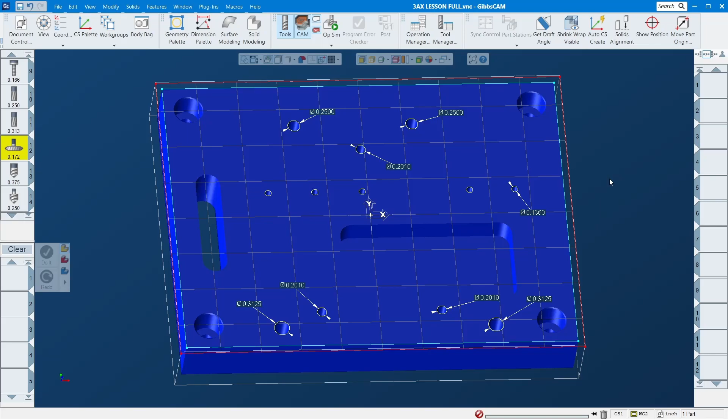Hi everybody, JT here. This video will include all the toolpaths if you want to make a program for a 3-axis machine. I used to make those toolpaths piece by piece, but this one I want to make so if you're new, if you want to start from the beginning, this video will include everything from face mill, volume mill, ream, a hole tap, a hole thread mill, a whole pocket and contour. So everything will be included in this video. If you watch this as a newcomer to GibbsCam, you will be able to learn it and apply this to your job, and then you can make your program independently. It will be long, so let's get started and hang out with me here.

So I modeled this one, right? Let me turn on the print. So this one basically had two dowel holes, side counterbore, tap 8-32, and one quarter-20 tap also, and some pocket and slot here, right?

So I cut time by creating all the tools here. Basically face mill and mill to finish outside and the pocket and slot, and this end mill is finished for the counterbore here, drill for 8-32, drill for quarter-20. This drill is for quarter reamer hole, and this one for this 5-16, and this drill is for the counterbore, and this is the 8-32 tap tool.

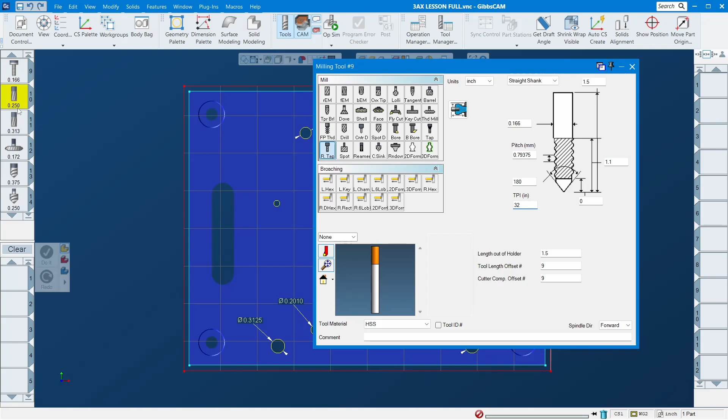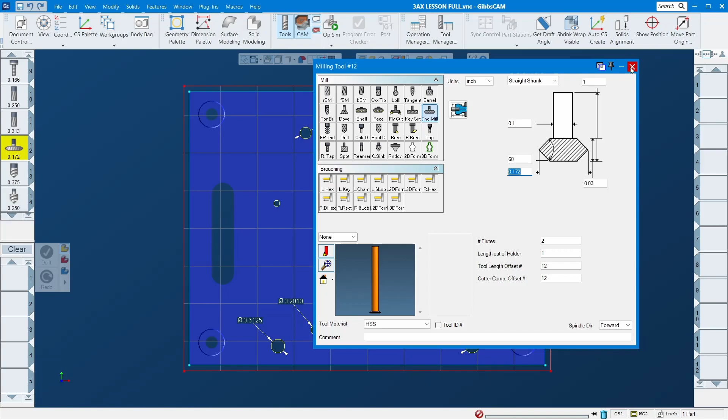Alright, so if you don't know how to set up the tap tool, it's in here. Put in diameter, measure diameter of the tap, and put this TPI in inches. If you do metric, you put it here, 0.5, 1, something like that. This one is the reamer for this, and this one is the reamer for that. This is the thread mill. You just get your caliper out, measure, and put all this number in roughly. This is spot drill. This is the chamfer tool. So all of these, as you can see, it's only this simple part, but it takes 14 tools already.

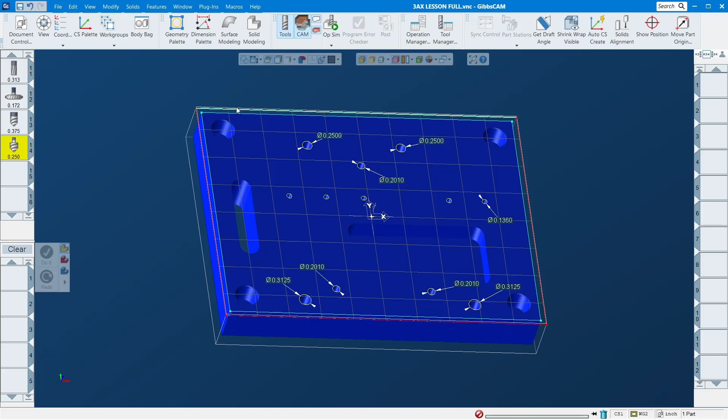All right, so that's the tool setup, right? The next one is the geometry. Let's draw the stock first, right? As you can see here, this one will be how long it is. Let's measure the 8 inches long. Okay, so that's 8 and 6, right? So the stock I draw is 8 1/4 and 6 1/4 because you want like an 8th per side bigger. So when you draw it out, you have a good outside finish.

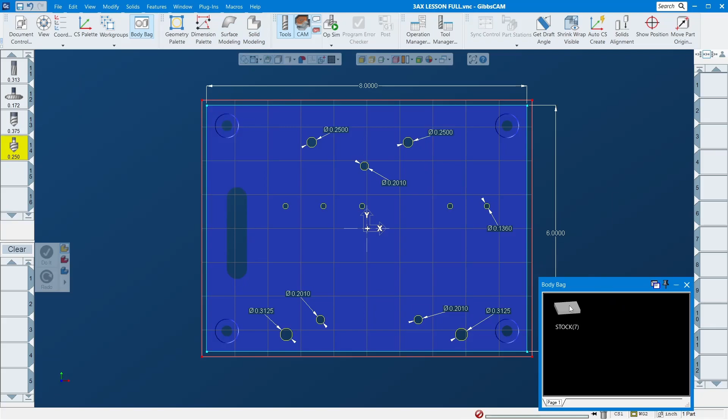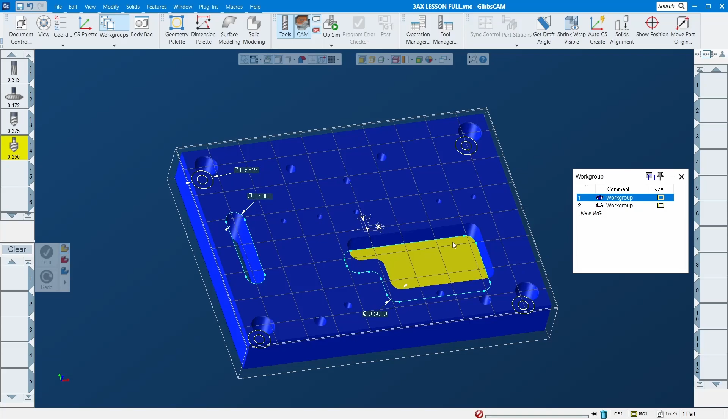But I also draw it, and here I also make the solid model for it, just so when you render it you can see it. It's a good habit to make your stock if you're new, so you know what your stock size is. So that is a stock, right? The next one is geometry. As you can see, I extract our geometry and dimension of these out so you can see it easily. And in here, this is the pocket, that's a counterbore, and that's the radius of the corner radius of that pocket. Okay, so that is the geometry, right?

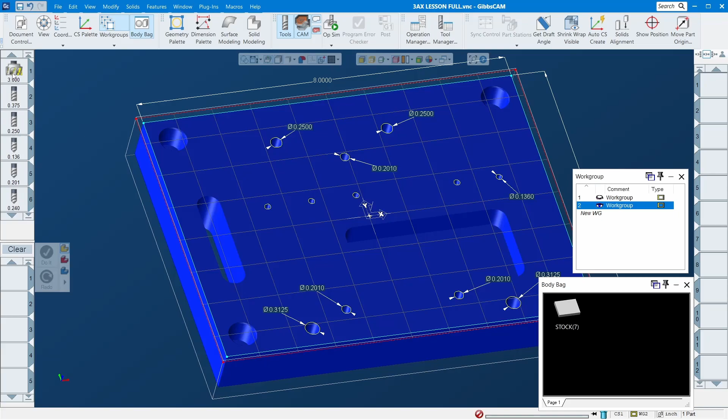So let's make the program. First thing is you have to face it up. Let me see the size of the stock. I think I make it little bit bigger. So the part is 1 inch, so I make the stock 1.05, right? I leave it 50 thousandths up so I can clean up, so that's where the face mill is gonna come in and face that 50 thousandths off. Okay, let's do this one, aluminum, 6500. I think that's good, that's 3 inches, so we can do.

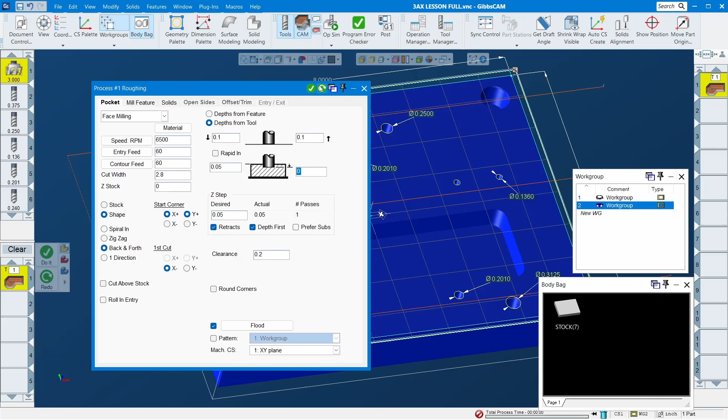Okay, first we have to do a face mill off. Okay, and leave 10,000 for the finish. 50... Okay, if you select this and it doesn't show up, that means you have it in stock, right? But usually you do shape because that extracts geometry from the stock model. Do it, right? And then next one is just, okay, finish one, do it. Okay, so that is the face mill.

After that, let's do the tap hole first. Okay, so we got the spot drill right here. Aluminum, so let's do 1500. It depends on the tool, but let's say this is just the high speed tool. Some drilling.

I think I'll make the tap size 166, so let's do 172, a little bit bigger so it has a chamfer. This number depends on your tap size. I just put the tap size here as 166, but I make that one a little bit bigger so you can see the chamfer. If you measure the diameter of your tap, whatever number it is, usually I add another 10 or 12 thousand, or 10 to 15 thousand, depending on how big of a chamfer you want.

Alright, so that is the spot, now is the drill. You can do peck full out, 18,000 or something like that, X60. And you want to drill all the way through, right? Because this one, the tap depth is not through, but the drill should be through, so I drill 100 below that surface.

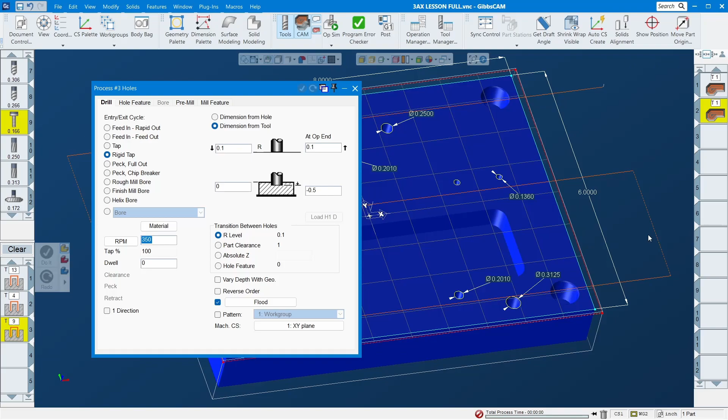Okay, the next one will be tap. Let's do 350 minus 0.5, give it the depth there.

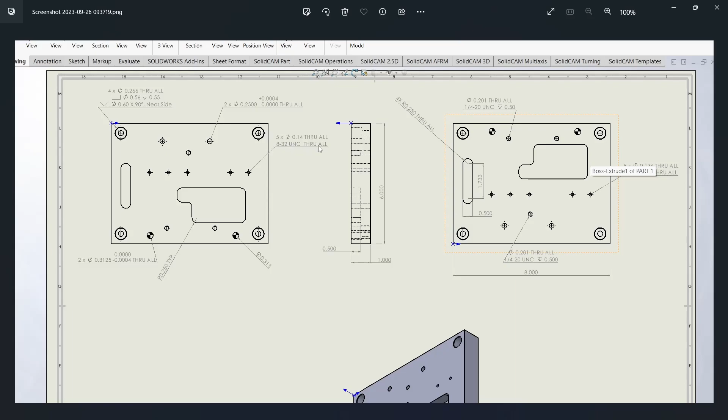Okay, let's go back to the model and see. So this is tap, tap all the way through 1 inch, but because the tap may not be all the way, you might have to hand tap it all the way too. Let's say if the engineer or whoever wrote this model needs only half inch down, then I did the half inch right there. But I think you know what I'm saying here. Alright, so next one, let's do a drill for this tap hole, right?

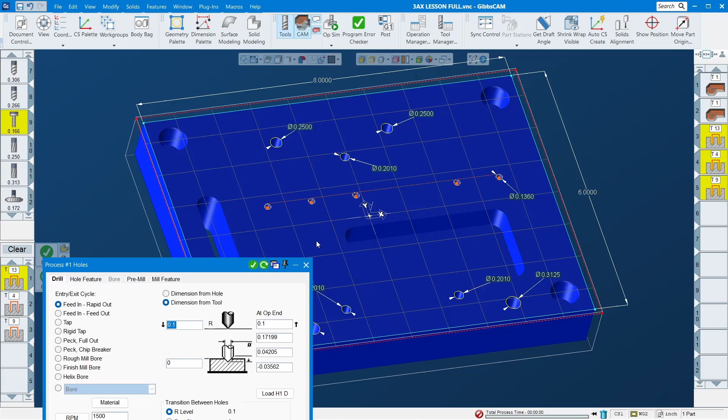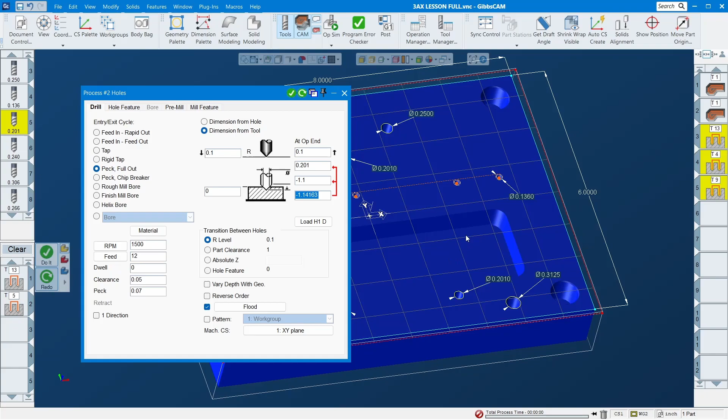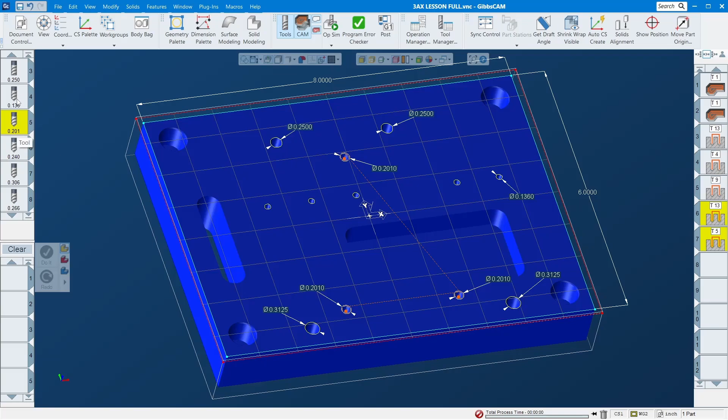Okay, let's move on to the next one, which would be the reamer, right? Reamer 250, so I do drill 240, good enough, right? And then this is the real for that. Okay, so that is the drill, right? And also do the reamer here as well, 250 reamer.

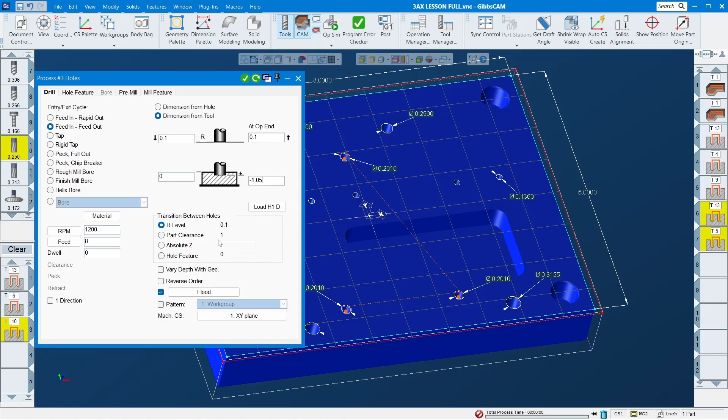Okay, with the reamer you want to feed in and feed out. Then let's do 12, 8, minus. I am doing feed and speed kind of slow just to show you, but whatever you do, whatever your tool manufacturer recommends, you should do it according to their data.

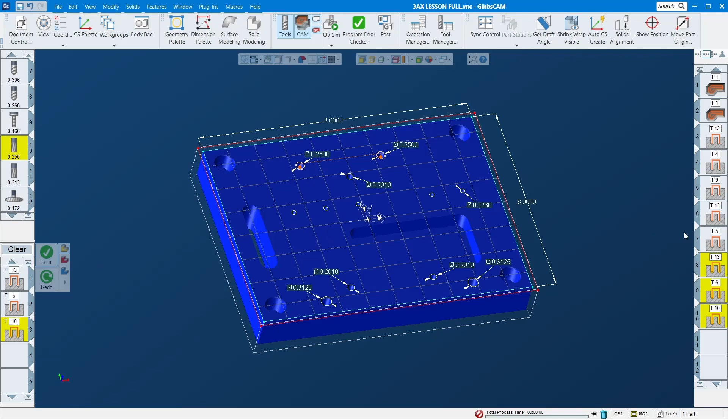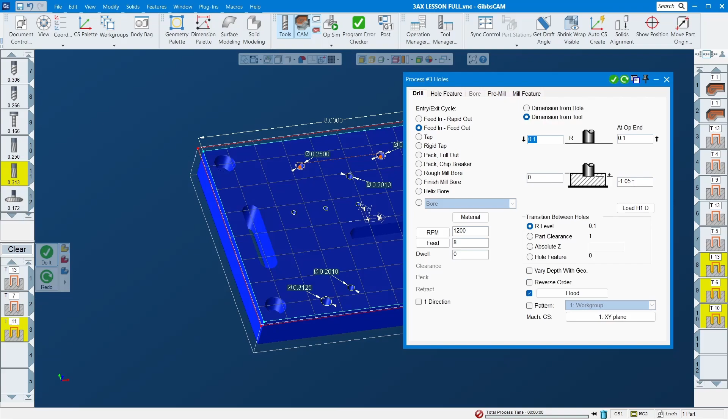Okay, next one will be this one. Drill for that, it is. And then the reamer for that is this.

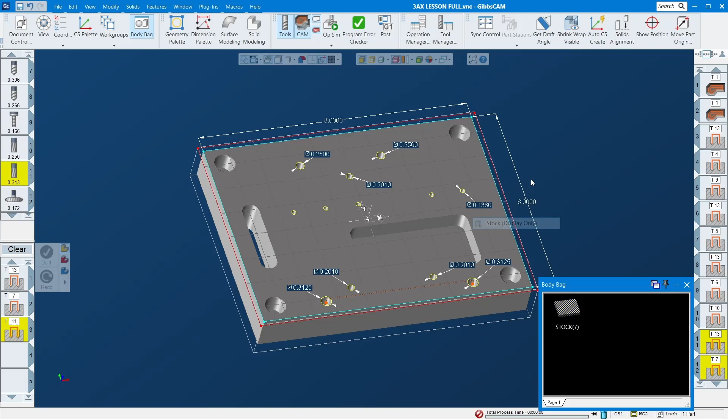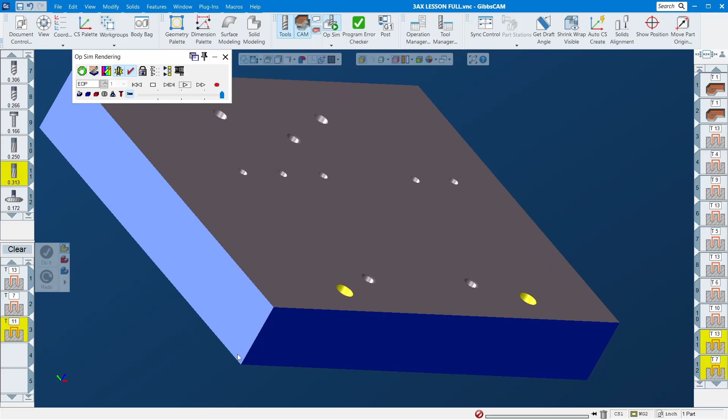Okay, and that is all. So let's render this one first, so you can see what you have done so far. So as you can see there, this one is not all the way through because we leave some 200 down here from the start, so you don't see it all the way through yet. But as you can see the number when I put it there, it should be all the way through.

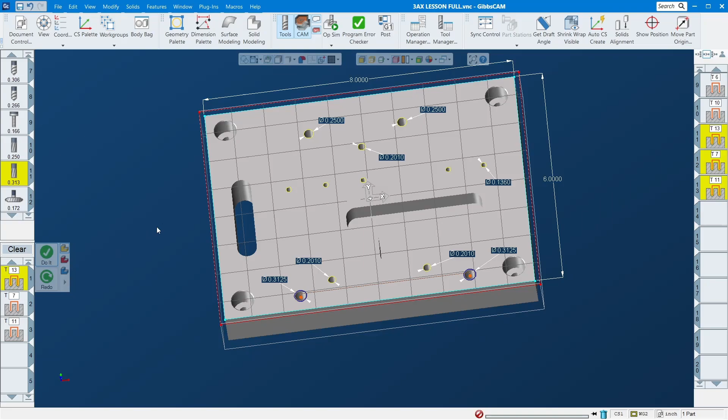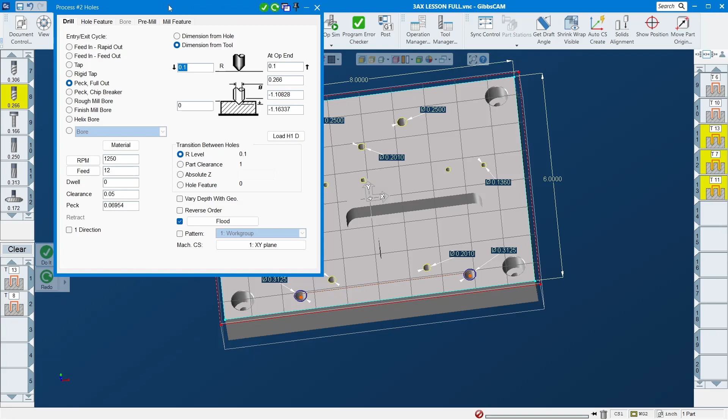Okay, next one is drill this for hole, right? So that's a 266, 270, okay. And this is the drill, just something like that will be fine. Okay, all the way through. Delete this one, and that will be in a different work group.

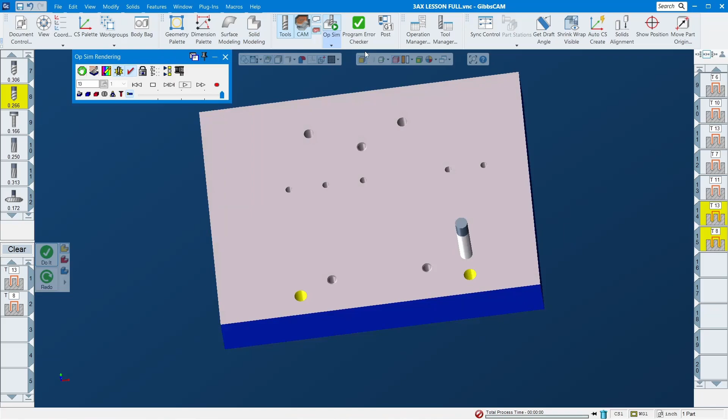As you can see, I make two work groups because sometimes when I have a lot of geometry, I don't keep all in one work group, so it gets kind of crowded. Okay, so render again so you can see it. Alright, so all the real hole tab, all the tap is done, all the reamer hole is done.

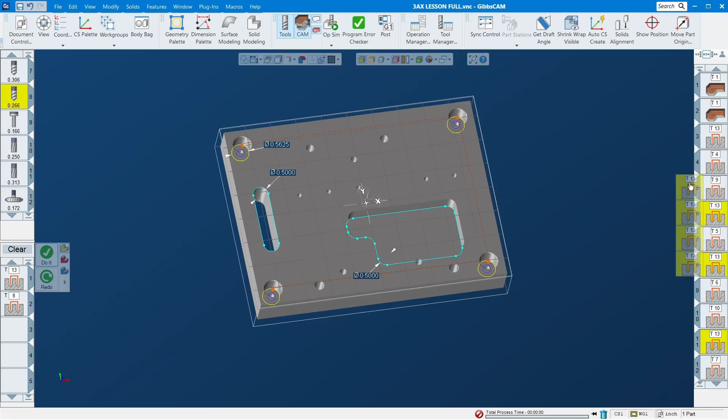But as you can see here, when you do this, all the spot drill is going to be generated a lot. So what I do is after I finish all this, I move all this spot drill to one place. So you select each of these spot drills, then you move it down there, so that all the spot drill gets done first, and everything else will do after that, just so the spot drill doesn't change every time it does a spot drill.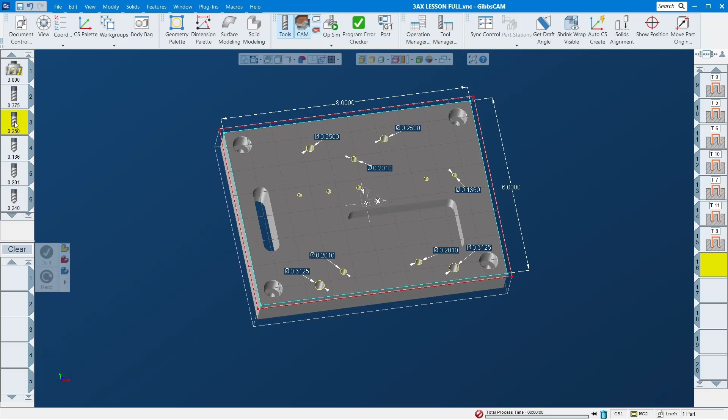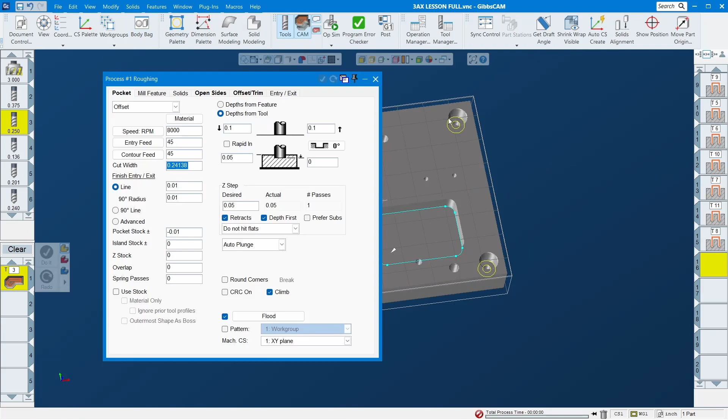Okay, next one, let's finish the counter bore, which I set up at 250 to rough. This one I would do offset, right? Do 8,000, 45, 45, okay. The step over depends on how deep you want to go, or if you want all the way through or two steps. Let's see, I think this is half inch deep, so if you do two steps, you can make the step over a little bit bigger, but if you want to go all the way in one step, then you do a little bit smaller.

Usually I do that because it's rough, so leave a little bit of stock so you have the finishing pass to go. Okay, 545, that's pretty deep. But like I say, if you have a good tool, you stick it out short, you can just do one pass and it will go all the way down there. Then I drag another one down, and this one will be finished, right? Finished.

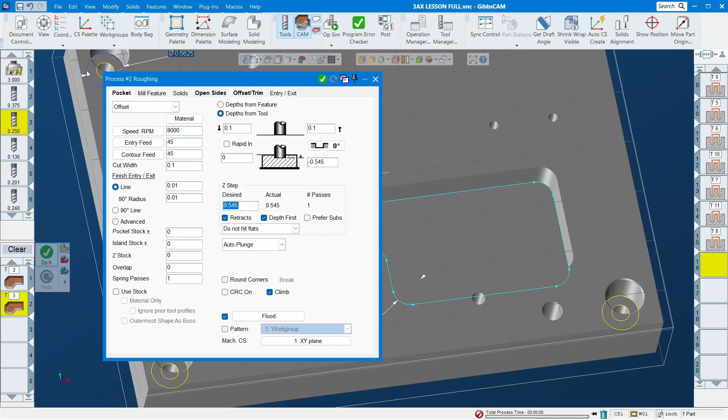Give it some radius, and then one spring pass, so it cleans out and looks nice. Then you select geometry and do it. Okay, so far so good, right? Okay.

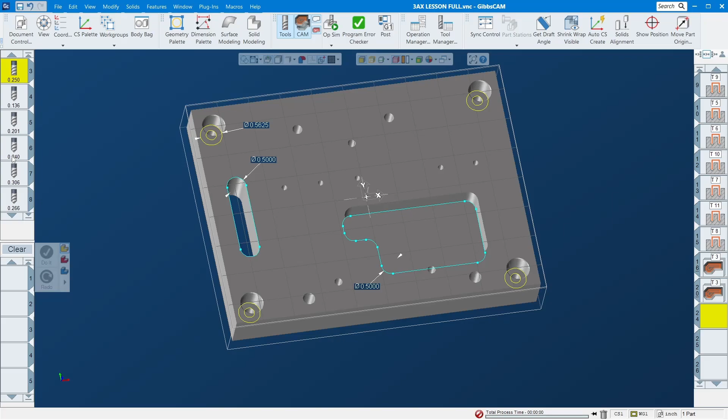All right, next one, let's do the thread mill so I can show you. Okay, thread mill. Select thread, right? Speed with aluminum, let's do 6,000. I think that's good enough.

Okay, so in here there's some option, you decide which one to use. You want to go from bottom up. Of course this one is going to be right hand, right? So you want to go from the bottom or from the top, right? This one you need to fill out here.

Finish cut diameter, so this is the pitch diameter. If you watch my old video, I talk about making a thread mill for millimeter and inches, metric and inches. So if you want a little bit more clarity, you can search for that video and watch it. But with this quarter 20, the pitch diameter, you can Google it, or the best way is to use the machinist handbook.

But I think it's about 216. Material 201, 201. Clearance diameter is just something smaller than this. So the thread mill goes in there and tries to go in the center for this setup.

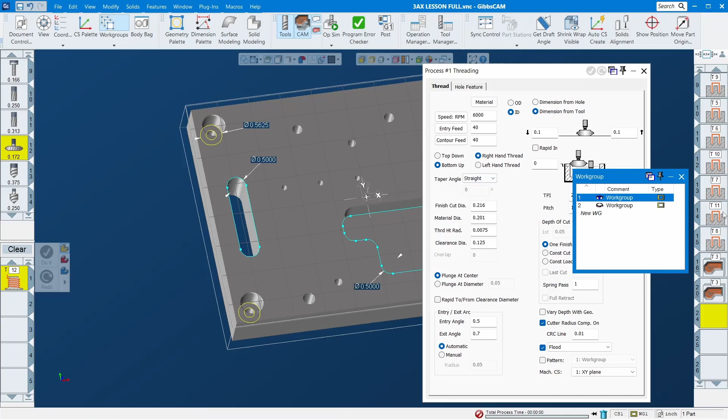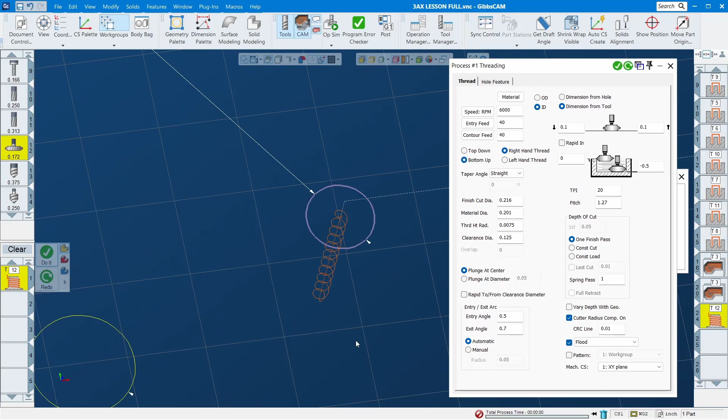Right, you can see here, it looks something like that. But here's the thing, usually I don't do just one pass and finish like this, right?

So what I usually do is I add, or not add, but minus 5,000, so it kind of roughs first, right? And then finish after spring pass 0, and that is so it's like a rough, and this is a finish, right?

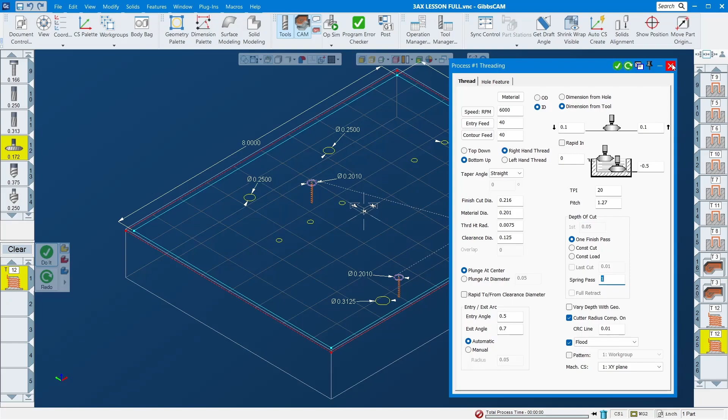And this finish is, like I have a spring pass here. You might have to do one or two spring passes depending on how it looks, but that's what I usually do. All right, so that should be all for that thread mill there.

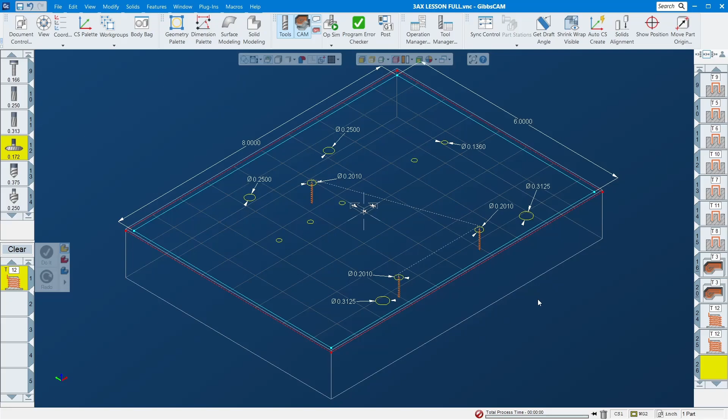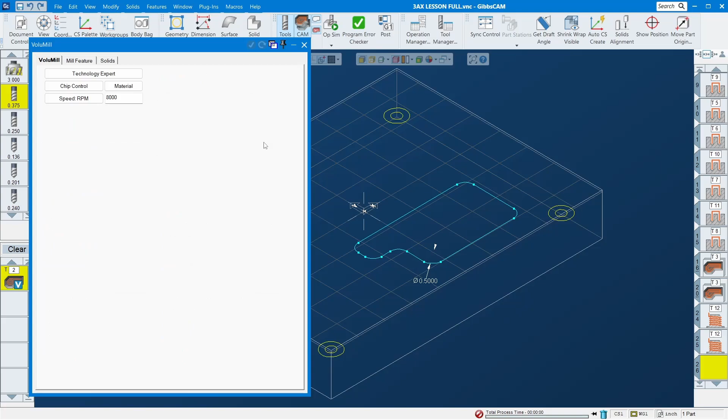Okay, right, so the next one we will do VoluMill to rough the pocket and slot down, right? 3/8 flat end mill, VoluMill. Okay, 8,000, that's good enough. 50. You want to leave a little bit of stock on the Z so you can go back and finish it. Depth, half inch. Okay, so fill all of these out and then down here you have to check this.

Sometimes this one is like 150, 250, something like that, so it's kind of fast. Usually I do close to this, so when it licks down, it's not too fast. And plunge angle, it's usually 3 or 5 degrees will be good.

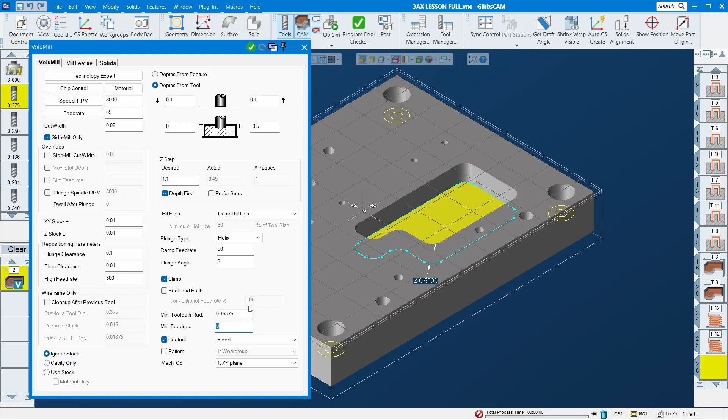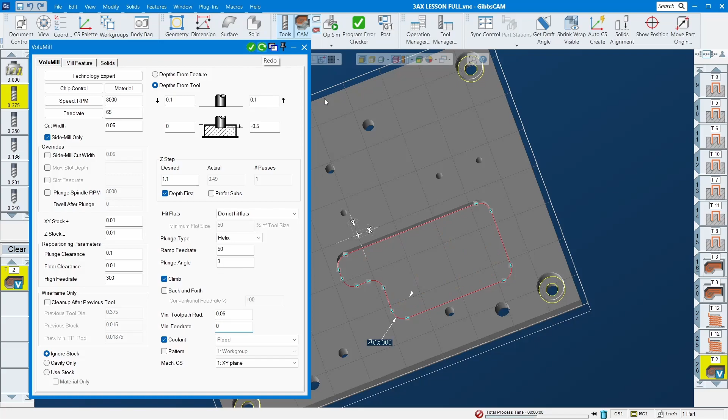Okay, and sometimes when you see this one a little bit big number here, I'll show you why. As you can see, when you see this number big, the tool doesn't have room to go all the way in here, right? So you have to adjust this one a little bit down so it can go all the way in. You can see that, right?

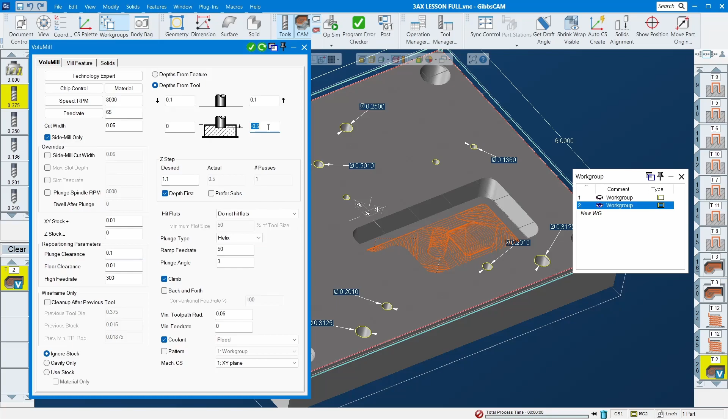So that's it, rough. And also since we're here we might have to do VoluMill out here as well. Out here then we don't have to do the Z. But that one is because the depth of this part is 1 inch and I go all the way down. Okay.

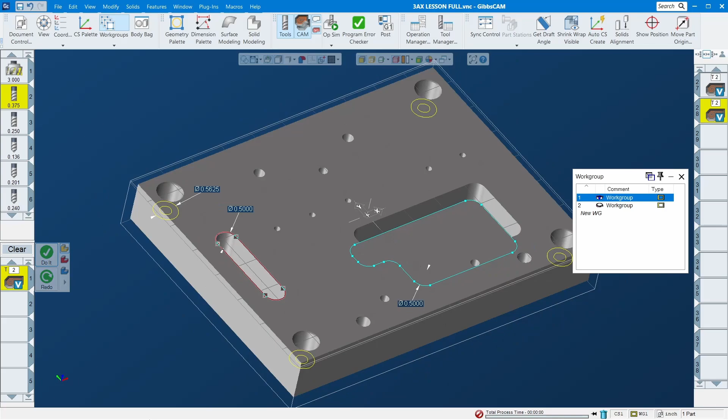And rough, this one may not work. Yep, it's not gonna work because it's too small. So we are going to do a different way for that. Okay, so that's the rough outside, rough the pocket.

Now let's do finish. Finish the pocket first. If you don't want to plunge it too fast, you can do it a little bit slow. Everything 0, 1 spring pass.

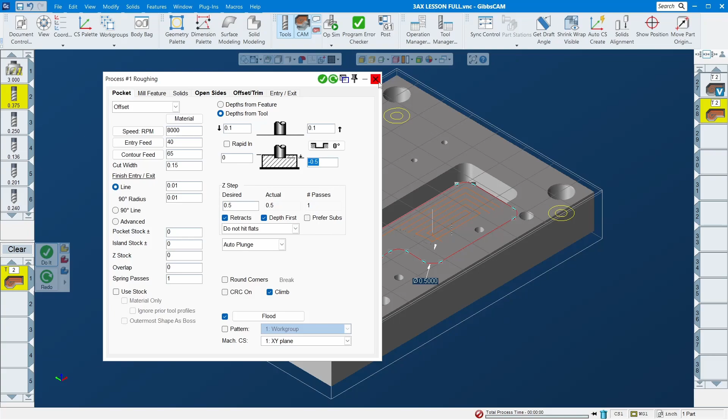And there you have it. That's the finish for that pocket, right? Okay, now finish the outside will be contour.

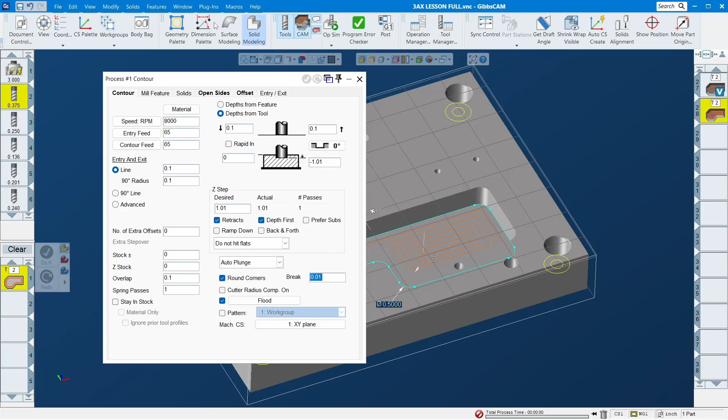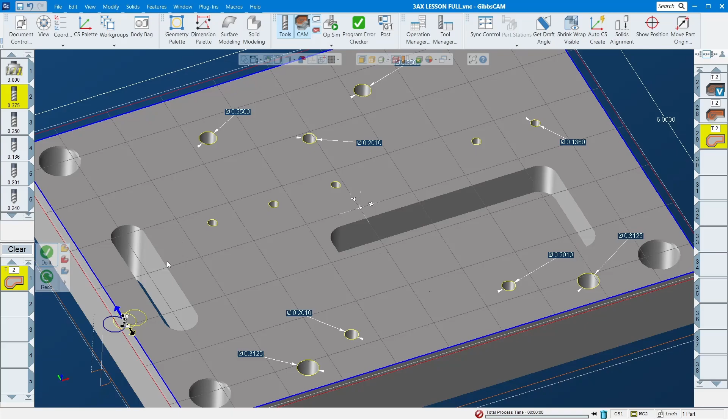Let's do on this side. Okay, so that's all of those will be finished, everything except this slot, right? So now we need to rough that slot out and finish.

I will use the same contour, but it will be ramp down because it doesn't have room enough to do volume mill. So this is what I do, same as this, just a little bit smaller. So let's have it, you do 20 thou, give it some material to finish.

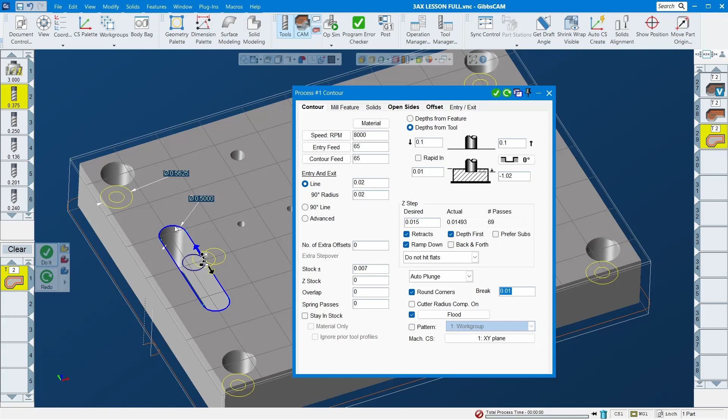0.02, okay, this is what I usually do, right? Ramp down. So what it does, it just tool pass continuously, tool pass ramp down, and each step is about 15 thou to rough all this one out, right? You can see there.

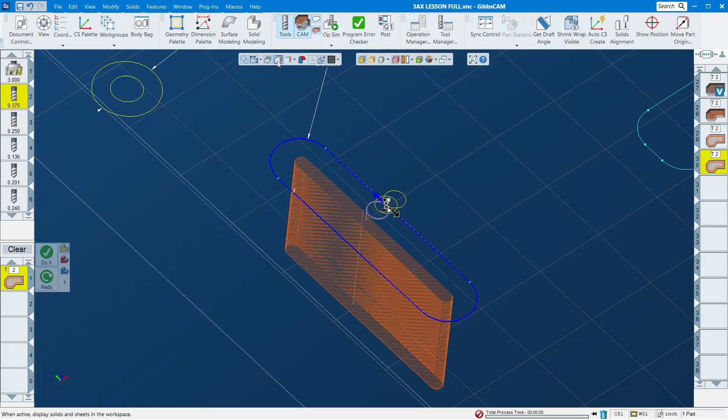So it go in, go around, and then go out and up. So the tool, touch the material, mill the material out, consistently. Okay, next one will be finished.

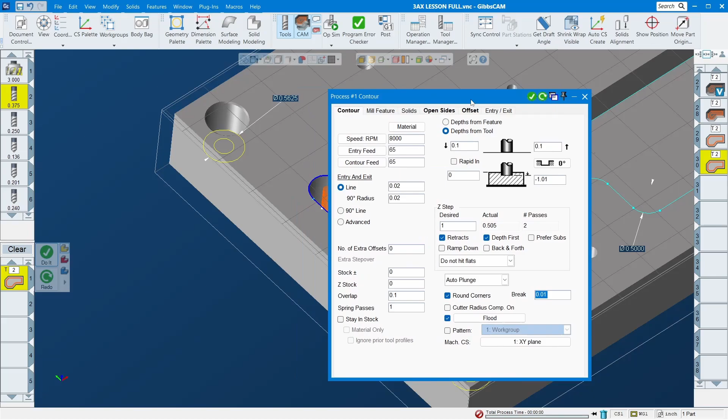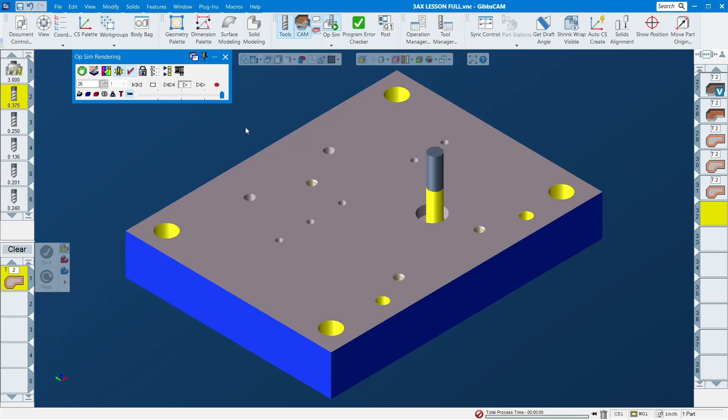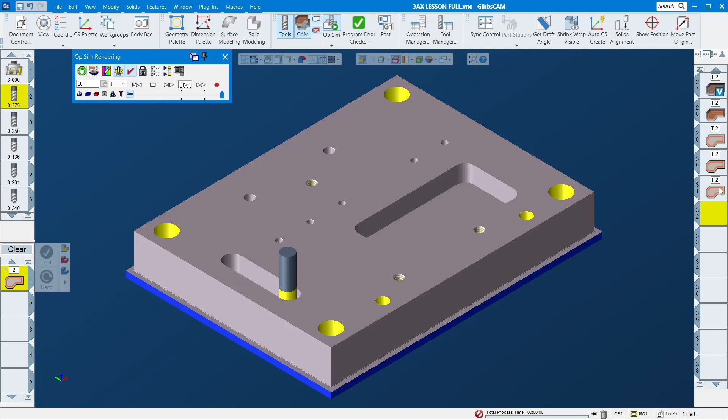So let's render it and see how it looks. Yeah, this one a little bit slow because of that ramp in two pass. Kind of slow rendering, huh?

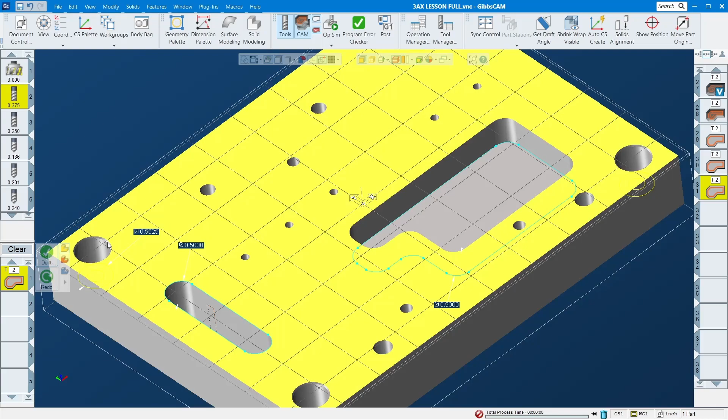Okay, while render, I want to talk about chamfer, right? As you can see, when you finish this part up, this will be sharp edge and maybe burr somewhere along it. So even though the model doesn't have any chamfer except this one, I don't think it matters much with the chamfer size.

So what I do is always chamfer, right? Whatever you finish there, you should chamfer it so it looks nicer when the part is done. About 5,000, I think it's good.

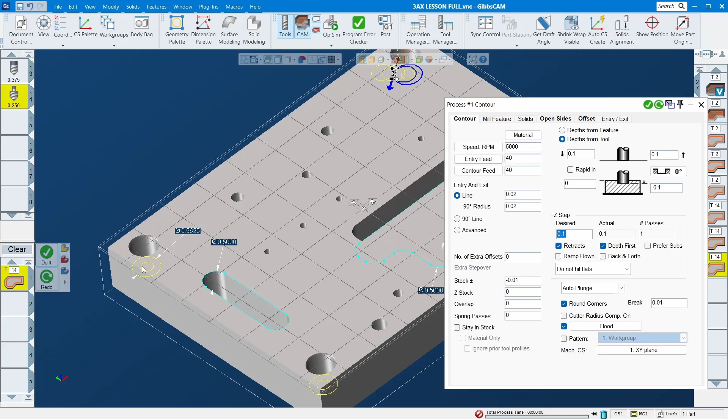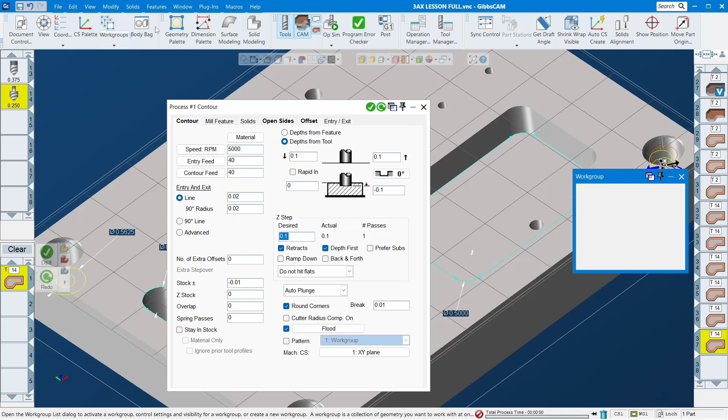Okay, make sure the blue selected circle is inside, so you don't cut from the outside, and this should be the last one. You see this one go inside, you have to select outside and go that way.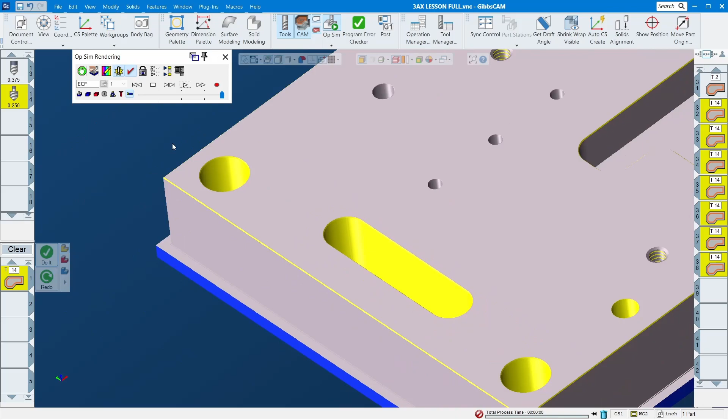So you can see, all of those chamfer will give you a clean part. Everything that should have a chamfer there, so it should look nicer. Alright, so even the tap or thread mill, I still have some chamfer, thread mill has some chamfer too.

So as you can see, this video will show you do everything, and you should have this step or this procedure, this two pass. You do it when you run on a 3-axis machine, and you'll probably see this feature every time - face, rough, volume mill, slot, counter bore, counter sink, thread mill, tap, reamer. I do this every day.

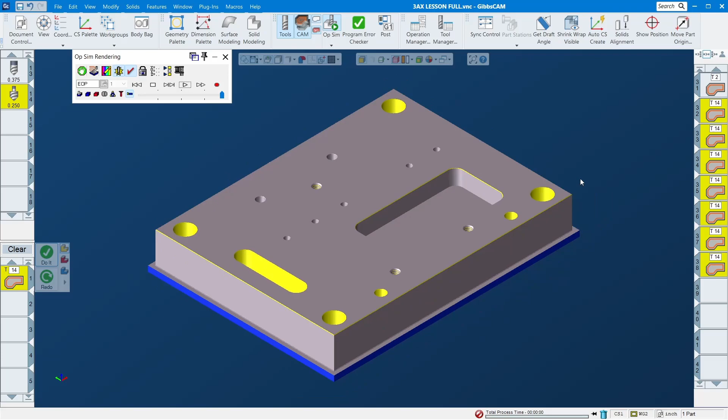So if you watch until now, you will be able to make your own program. Nobody needs to train you or teach you.

The only thing I'm asking you is to look closely on feed and speed, because every tool manufacturer will be different. I mean, if you have a good tool, if you have through spindle coolant, you don't even need to peck, so it should go all the way down through it.

So, alright, hope you guys learned something here with me, and hope you guys like my video.